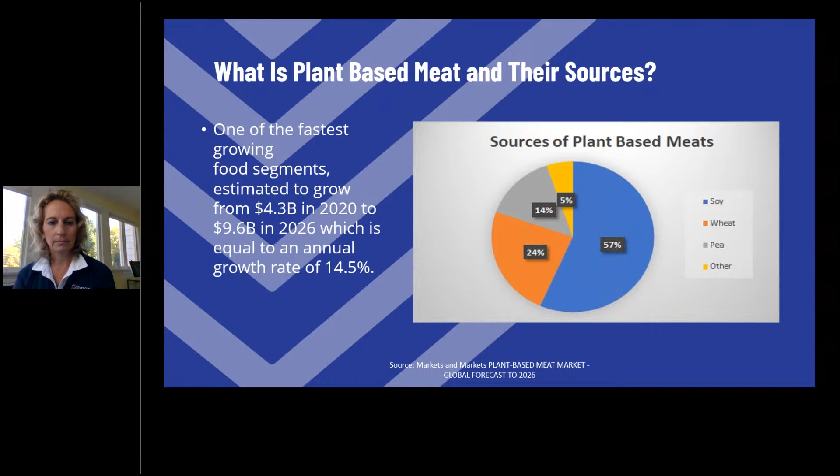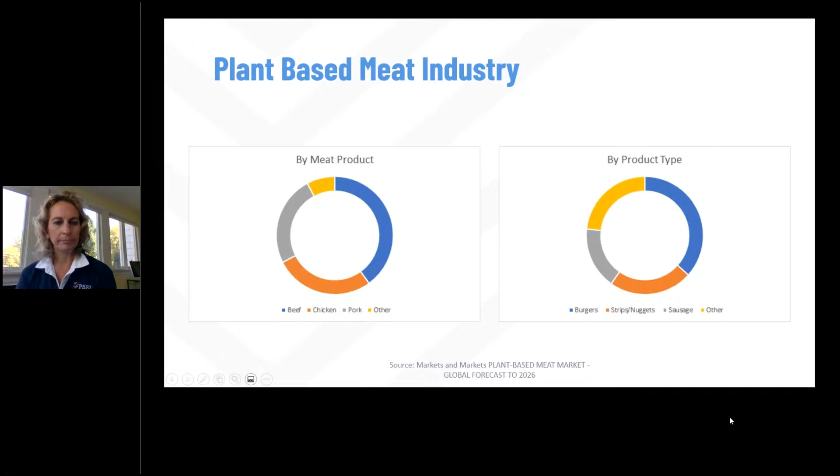As far as what is driving this trend, obviously the number one would be the increased awareness of the benefits to a vegetarian or flexitarian diet. Second to that would be all of the investment going into product development of these types of products. Many of our partners, as I mentioned, are new startups, just as we have large global national companies getting into this market and at the forefront of it today, coupled by a lot of government investment from a sustainability or environmental component. In addition, with the internet and so forth, there's also an overall growing awareness of any animal-borne illnesses, and that information is disseminated immediately.

If we think about what are the barriers to this industry, obviously the number one would be cost. It's not easy or inexpensive to start up a food processing facility anywhere in the country, particularly in North America. Second to that, a barrier would be allergens to some of the ingredient sources that we mentioned earlier. And then obviously COVID is having an impact overall, not just on this industry, but most in general.

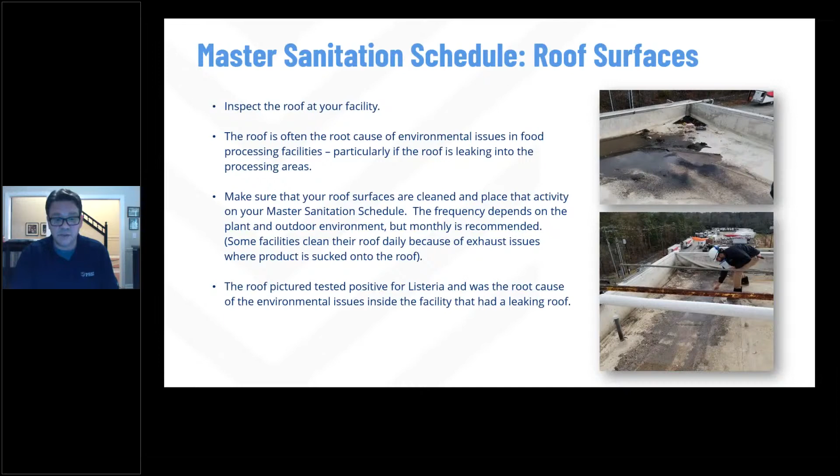You can go to the next slide, Elena please. Another master sanitation schedule issue that I see out there is the roof air units. So while you're up on the roof checking it out, check out how the air is blowing into your processing areas. You got to look at the units and the systems to ensure that they're clean and that they're on the master sanitation schedule. These get neglected all the time, even if they are on a master sanitation schedule, because rarely is this cleaning of these units inspected.

On the filters, make sure that changing the filters is on a master sanitation schedule, and just have them put dates on the filters with a Sharpie, so when you go up there and check, you can tell the last time those filters were changed. We have to make sure that this air, particularly after filtration, is as clean as possible when it's going into our plant, so that we can protect our products from high APC counts, spoilage bacteria, or even worse, environmental issues that might be coming in through the air from the roof. You can go to the next slide, please, Elena.

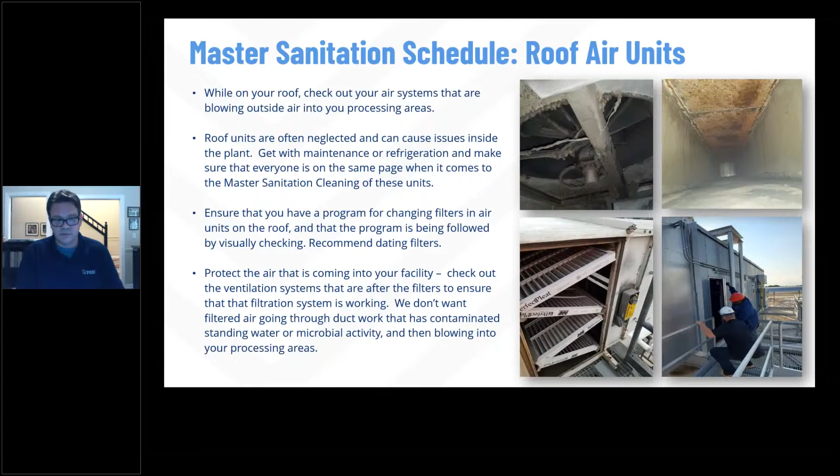So other master sanitation schedule issues I see, it's the air units inside the plants. The units and cooling units on the ceilings of your production area could be blowing contaminants onto your food contact surfaces and your food itself. So it's time to get out the ladder, a scissor lift. You got to get up and inspect these units, make sure they're being cleaned properly, that they're on the master sanitation schedule.

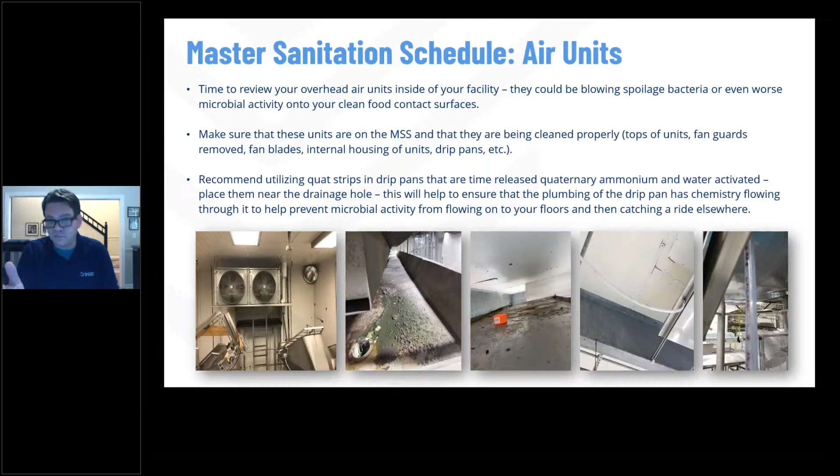So you got to make sure your drip pans are properly plumbed as well, okay? Preferably, they need to be plumbed to a drain and not just onto the floor. But we need to make sure that plumbing is flush and clean during the unit cleaning as well, because microbial activity is common in these drainage lines. You see the fourth picture is a bowed drainage tube that has standing water in it. That fifth picture just shows a drainage tube coming down from a drip pan that has obvious mold growth inside of it. You can go to the next slide, please, Elena.

So next we're going to talk about drains. They're one of the biggest culprits of bringing microbial activity out into our plants. When the drains back up, all that nastiness is brought up into your food processing area. Anything that comes in contact with that backed up drain water, like forklifts, wheels, boots, that spreads the pathogens throughout your plant.

So make sure that you have drain backup procedures in place, and you need proper drain cleaning procedures for your facility. If backed up drains are a chronic issue in your facility, then you've got a food safety problem that needs to be addressed as soon as possible. So ultimately, fixing the drainage problems through construction, that's the best answer, but that's expensive, a lot of downtime.

So the last big thing I see when it comes to master sanitation schedule issues in these plants is equipment breakdown. Many of the food processing equipment we use require electronic components that are considered sensitive to sanitation. So start checking, start looking inside your equipment's paneling that covers these sensitive components. Now this equipment's all designed to be sealed, but if even one bolt is missing or a seal is cracked, moisture is getting in and microbial growth is happening.

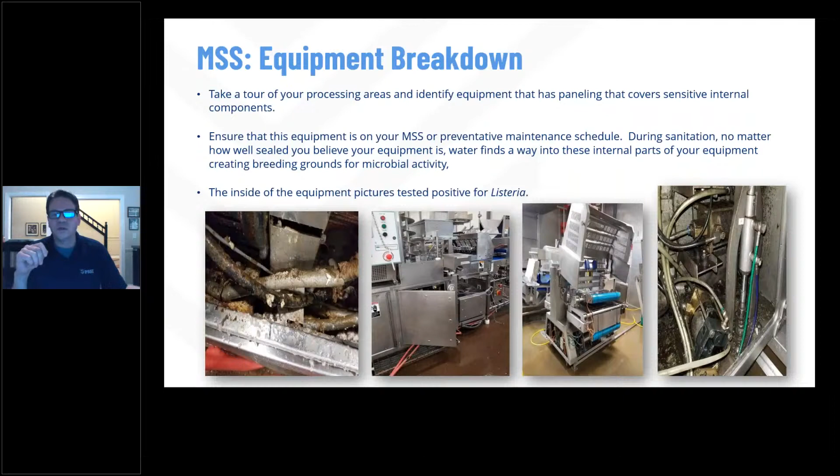So that's not everything on master sanitation schedules. It's just some of the most common issues I see in the field. But now let's get into some sanitary design items.

Like my master sanitation schedule slides, these are just a couple examples of what we see in the field with sanitary design opportunities. A true sanitary design presentation could be 100 slides, and with this association consisting of food processing equipment manufacturers, there's probably a lot of people on this call who know more about sanitary design than I do. But I'd like to say that in the 19 years I've been with PSSI, equipment designs have gotten so much better in the last two decades from a sanitation standpoint. So thanks to all you food industry equipment engineers who've helped enhance these food safety programs. Great job to you all.

So here are the basic sanitary design principles for equipment as defined by the North American Meat Institute. We want our equipment to be cleanable to a microbiological level, made of cleanable materials, accessible to be cleaned. We don't want it to hold or collect water. We want it to be sealed, with no niche areas. I'm not going to go through all of these, but I wanted to go over a sanitary design experience I've observed with conveyors, and then look at some additional common harborage areas I'm seeing out in the plant.

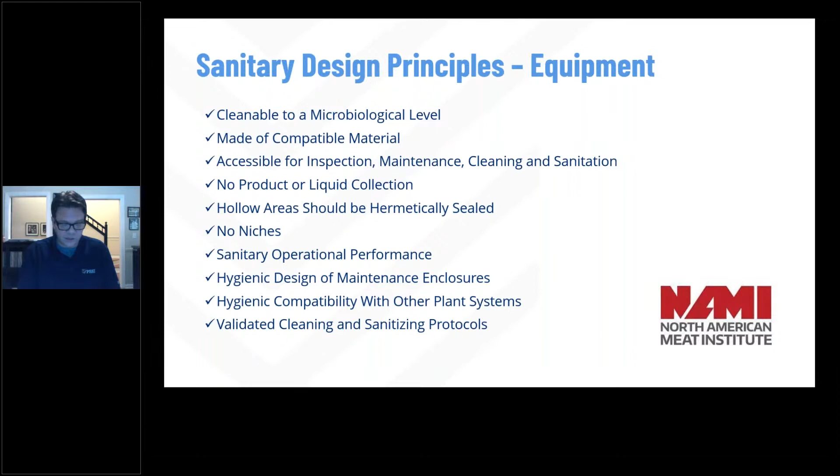PSSI cleans tens of thousands of conveyor belts every night, maybe hundreds of thousands—I don't even know. It's the most common thing that we clean. So that's kind of what I concentrated on here.

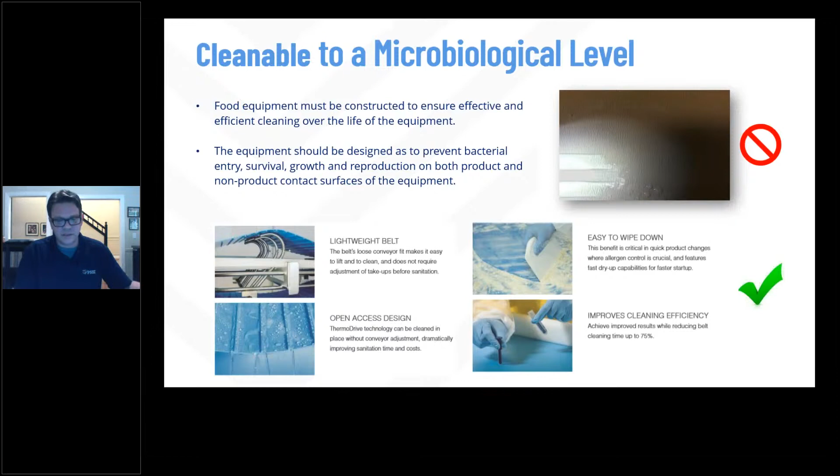This takes even the most skilled and experienced maintenance workers a ridiculous amount of time to do, and then they have to put it back on in the morning. So between taking it off, cleaning it, and putting the belt back on, we're talking hours of downtime every morning if you wanted to clean this belt properly.

These belts are from the plant I showed you the roof of earlier, and that roof portion was just above where these incline belts were. So Listeria that was positive on the roof was leaking down into the production area, and it made its way inside an incline conveyor in between UHMW and stainless steel sandwich points, which we'll talk about next.

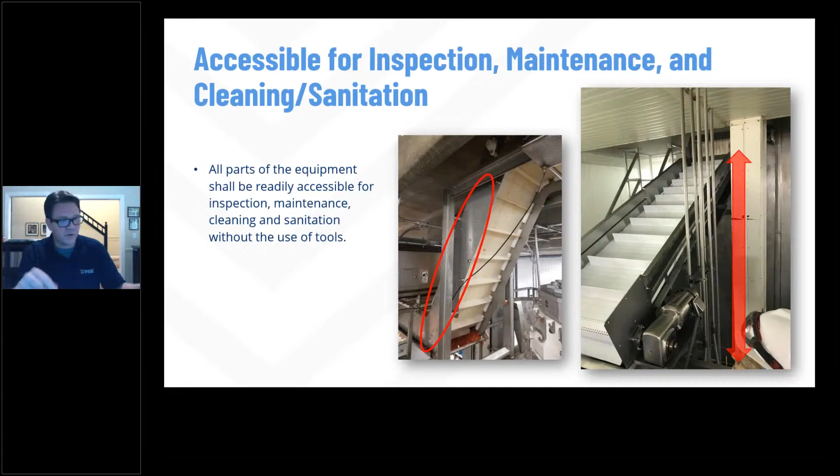We find through environmental monitoring that sandwich points are common harborage areas because they are impossible to clean and they're not taken apart often enough for deep cleaning. So check your facility for these sandwich points. Commonly it's UHMW bolted flat to stainless surfaces; sometimes it's stainless bolted onto stainless. But we need gaps between those surfaces so that we can clean them properly every single night.

So sanitation needs accessibility. We need gaps, and we can't have sandwich points. That's what we're really looking for.

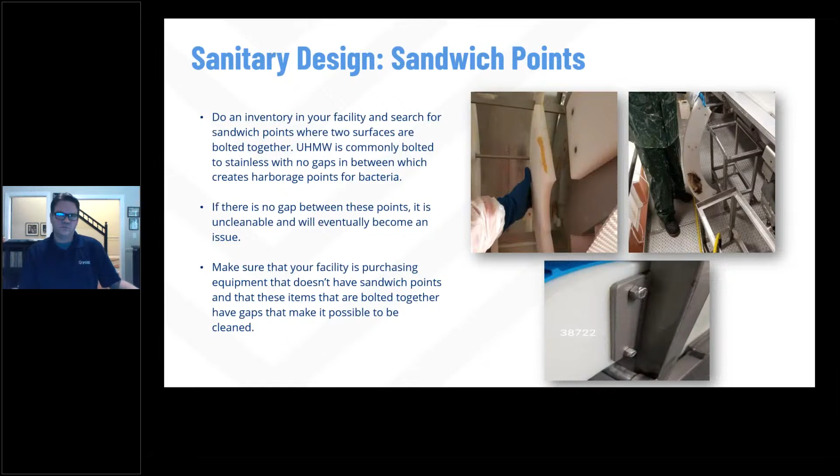Lastly, I want to look at hollow framework and hollow rollers. The industry's gotten way better at this over the years, but there's still tons of old stuff out there that is hollow and harborage points for microbial activity. We basically consider any exposed hollow framework to be contaminated with microbial growth. Make sure you're removing these old designs as you tour your facilities, and replacing them with angle iron, cleanable framework, and solid rollers.

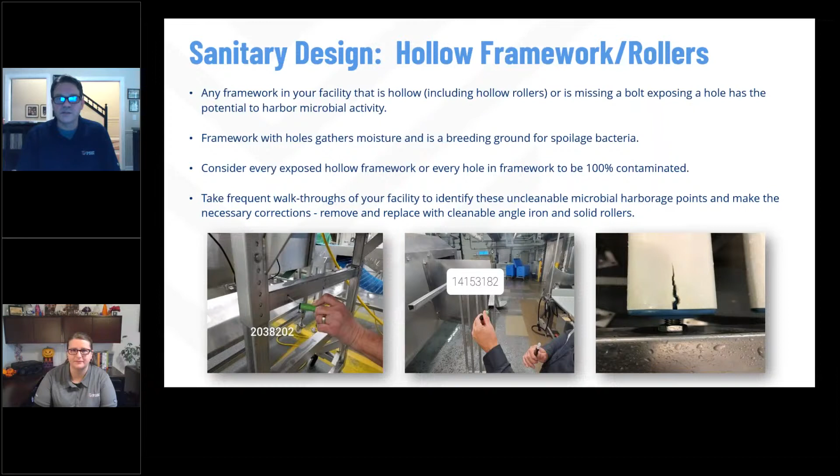Hello everyone, my name is Josie Grieve-Peterson, and as Ryan said, I am the corporate microbiologist for PSSI Food Safety Solutions. My section of the presentation is on environmental monitoring. As Ryan mentioned, a lot of the same food safety principles used in animal-based processing are used in plant-based processing, and the same is true for environmental monitoring practices.

Environmental monitoring is a way of scientifically verifying that food safety systems are working as intended. Examples of food safety systems to be verified are cleaning and sanitation processes, hygienic zoning of the facility, sanitary design of the equipment, and employee practices like GMPs. The results of environmental monitoring provide insight into the microbial population in the plant. Usually, pathogens are monitored for their presence, and indicator organisms are enumerated and trended.

Typically, having an environmental monitoring program is required when the product is exposed to the environment after the kill step and before packaging. Furthermore, it may be required by regulatory agencies and/or GFSI, depending on the product.

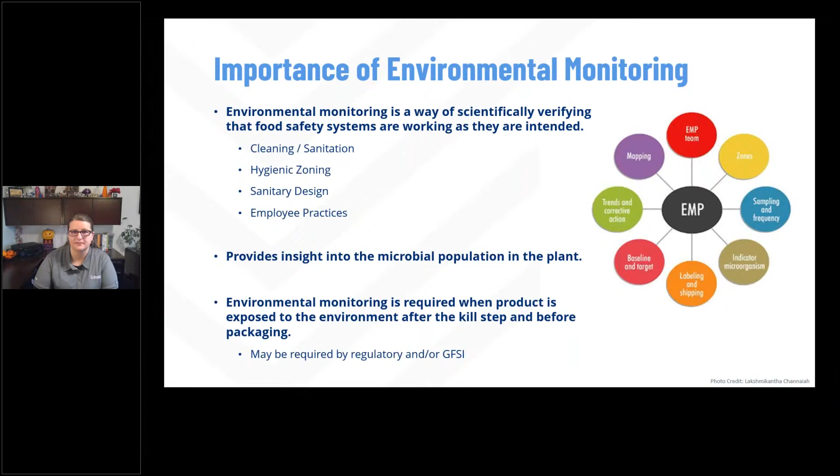Having a robust environmental monitoring program is just one level of a stair-step approach to verification of food safety and sanitation programs. Each step should include analyzing and trending the collected data. If there are positives during pathogen environmental monitoring, there should be red flags in previous steps that say, hey, there's a problem here. If you aren't seeing these red flags at previous steps, then the verification program needs some reevaluation.

Let's take a look at each step. In the first step, pre-operational inspection, the team is using all their senses to evaluate the production area. A visual inspection, smelling for off odors, and touching the equipment for greasiness or sliminess prior to final sanitizer are best practices for effective pre-ops. If there are microbial issues arising, it would be a good idea to observe pre-op to confirm this verification step is working as intended.

The next step in verification is ATP testing. ATP swabs are used to quickly assess the cleanliness of surfaces, so they make a great tool for immediate sanitation verification, as Ryan mentioned. The presence of ATP on a surface indicates contamination, which could be from food residue, allergens, and/or microbes. If all equipment surfaces look and feel clean during pre-op, ATP swabs will give immediate feedback if the surfaces are ready for food contact.

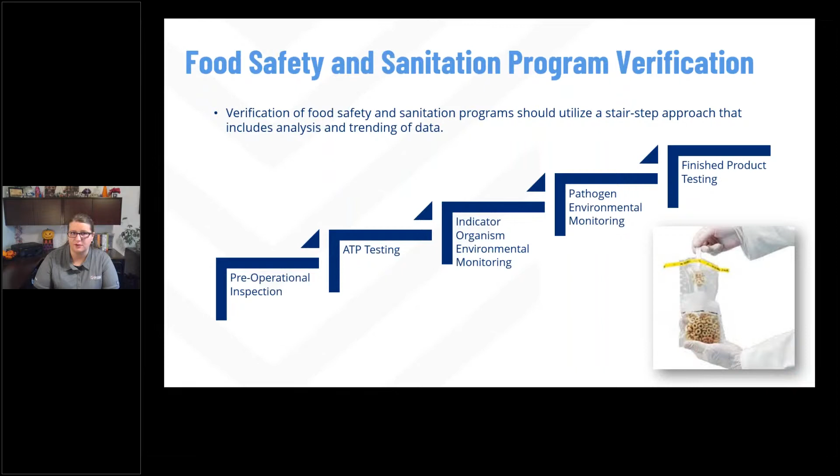The last step of food safety and sanitation program verification is finished product testing. Specifics on the sample size, sampling frequency, target microbe, and test method depend on the product. Finished product testing is often not very effective for controlling food safety, but it is used for process and product verification. The idea of this stepwise approach is to catch microbial issues sooner, before they reach the finished product.

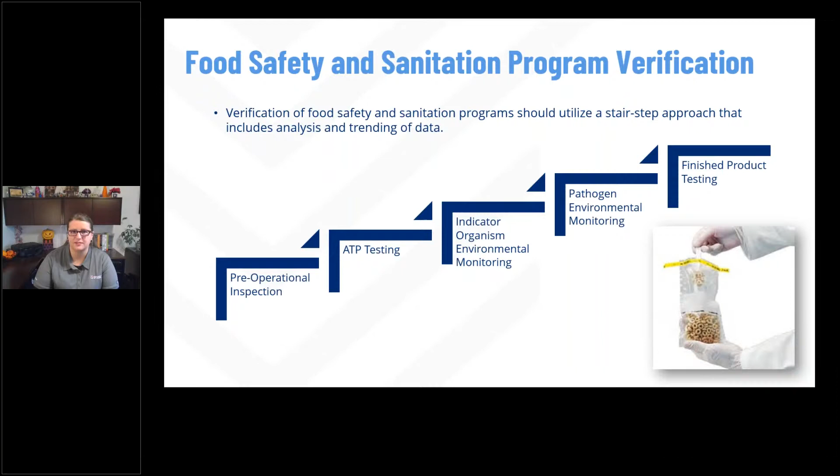At some point or another, you should get a positive during your environmental monitoring. A tool that is helpful during an investigation into the source of this pathogen is vector swabbing. Vector swabbing is when you take additional swabs around the initial positive site to see if the contamination has spread. The initial positive site might not be the root cause source. For example, you may have gotten an initial positive in a drain, but with vector swabbing, you find out the source is a cracked hollow table leg.

When collecting vector swabs, it's recommended to take 3 to 5 samples in varying directions away from the initial positive site for 3 consecutive days. Vector swabbing is like being a detective solving a mystery.

Each new swab should bring you a clue closer to determining the root cause of the microbial issue. Another tool for monitoring and investigating is EMP mapping. Environmental Monitoring Program Mapping is simply a way to visualize environmental monitoring results on a facility map. It's a helpful tool to point out problems in the environment.

When starting out, it can be as simple as printing out a facility map and using push pins on a corkboard to mark the swab sites. The next level mapping could be having an electronic map that includes hygiene zones and traffic patterns, plus the swab locations. And the most sophisticated mapping tools are dedicated mapping software that may also feature swab scheduling and corrective action tracking. I think each level of mapping has its place, and each can add value.

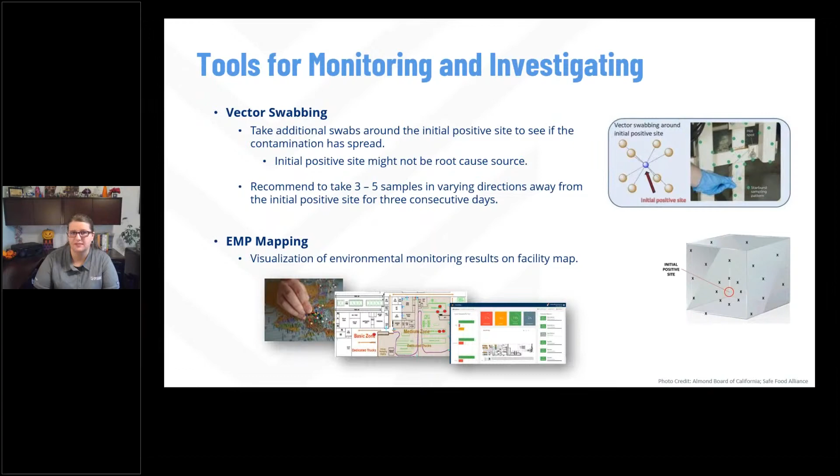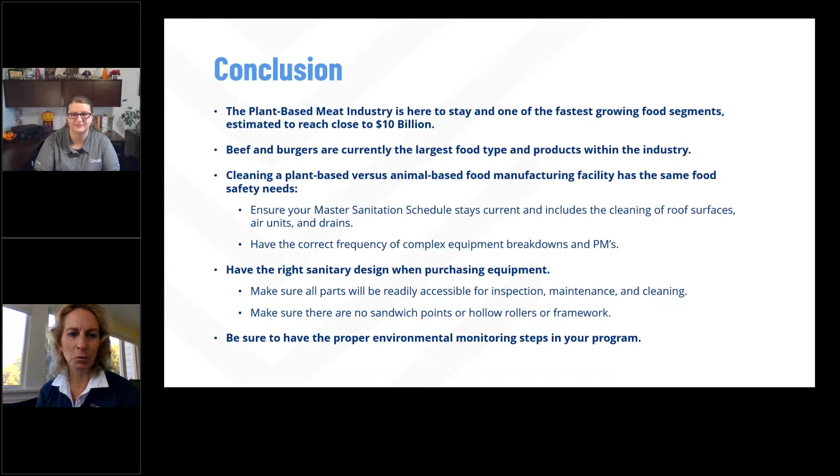Thank you, Josie, for those points. So in conclusion, we hope you have enjoyed our webinar and found this information helpful, particularly if you are entering into the plant-based meat industry. As we've shared with you, it is one of the fastest growing segments in the food industry, one that we are personally experiencing, the cleaning of these new locations. Over the next 5 years, the industry as a whole is estimated to approach $10 billion.

Within this industry itself, the product type that's most popular in product source would be the beef and burgers. With regards to cleaning animal-based versus plant-based, they are pretty similar. Ryan talked about the importance of making sure that the master sanitation schedule is staying current, and in particular, the importance of ensuring that it includes the cleaning of your roof surfaces, the air handling units, and having a thorough and robust drain program. We can't emphasize that enough with what we see.

In addition to that, you have to ensure that the frequency of your complex equipment cleaning is done with the right frequency in general, but also from a preventative maintenance standpoint. And then also to ensure that you have the right sanitary design. We love it when our partners ask for our input and feedback when a new piece of equipment is just a thought, not when it's on the floor after the fact.